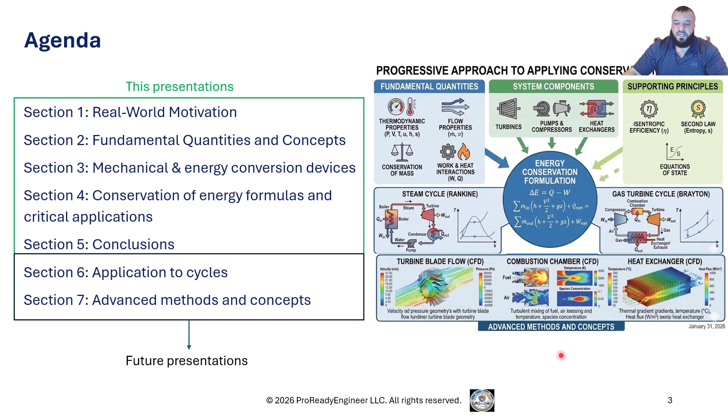Okay. To set you up for success, conservation of energy is a concept that you come across in your day-to-day life, and you either notice that or you don't. So let me tell you.

See the fan that sits on your desk. What is this fan doing when you turn it on? What exactly happens? You say, it blows air on me. That is conservation of energy. How is that? You see that rotating element that rotates—it took this rotating mechanical motion and transferred it to fluid motion.

Your water heater—what does your water heater do? It burns natural gas. You know there's a natural gas connection, many of you probably went in your basement and seen the little flames there. It takes this natural gas and that energy, and heats up your water. That's conservation of energy.

Your air conditioner, your fridge, your car engine—you put fuel in and you get your wheels rotating and you travel. Mechanical motion from fuel energy, conservation of energy. The jet engine, when you fly, that device on the wing that powers the plane—principle of conservation of energy.

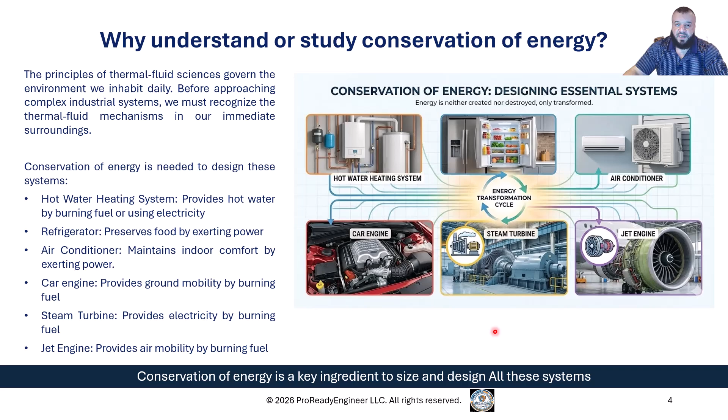This is all governed by the conservation of energy, so it's a key ingredient—we need to know it well. We are going to get on it, starting by the very basic bolts and nuts. We're going to talk a little bit about conservation, concept, properties, heat transfer, fluid flow, work, closed and open systems.

So let's do that. In every section, I'm going to follow the same strategy—I give you the name of the section and the ingredients or components of that section. I'm going to strongly advise you to go back to my video about properties and watch it first. I have a slide here, but the video is like an hour and a half, talking about properties, how to feel them, how to measure them. I got a tremendous amount of positive feedback from people who have seen the video, so thank you for that. Always remember when you watch my materials that I am actually following a sequence—it's not haphazard. I publish something and I build on that, and I keep doing that.

So very quickly, a refresher about thermodynamic and flow properties. U is internal energy—think of it as the energy of the molecules. It's something that's a very strong function of the temperature.

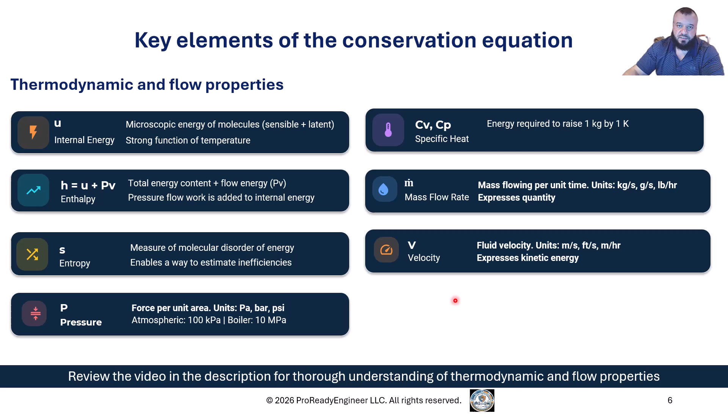Concept of entropy, a measure of disorder. Pressure, force per unit area. CV and CP, specific heat, the energy required to increase the temperature by 1 degree. Mass flow rate, the amount of mass flowing per unit time of the fluid you are working with, and v is the velocity. I'm going to put the link in the description for you to learn more about these properties.

In the other video, I did not discuss these concepts on the screen, so let's get on it. Before I talk to you about conservation of energy, if I'm going to teach you about conserving something, you better know first what that something is. Enthalpy is one of that something. It's the energy of the flowing fluid.

We discussed that. Now add to it potential energy. Potential energy, you've taken it in your high school courses, where they told you MGH, right? There's a datum, you take something, you go from the datum. They told you when you're standing there, the potential energy you have is MGH.

So where is the mass here? Why didn't you put mass, M or M dot or mass flow? Because this is just a specific energy form. Specific energy is in joules per kilogram, energy per unit mass. We often use both flavors: the one where we say here is the energy per unit mass, and then when we say here's actually the total energy, you multiply that by the mass. So the units are joule per kilogram, kilojoule per kilogram, BTU per pound, energy per unit mass, and this also reduces to feet squared per second squared, meter squared per second squared, and so on.

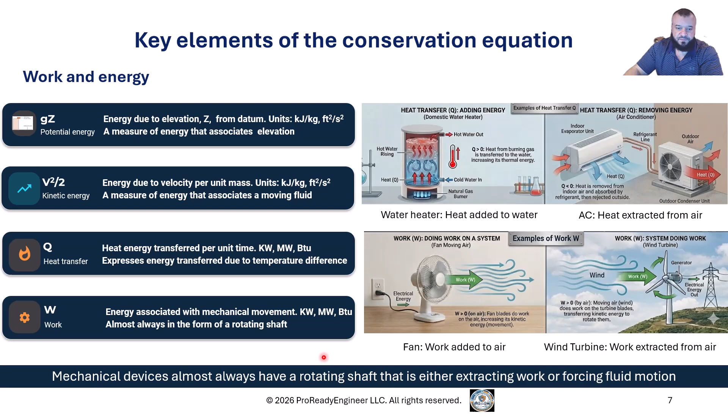If we are analyzing your fan, then your fan is our system. That's it. If we are analyzing your water pump, that's our system. A turbine, that is our system. Your boiler, it's our system. That's system. Open system means there's a mass flowing in and a mass flowing out, or just in or out. There is mass flow.

That's an open system. So when I say that, the first thing that comes to your mind, well, everything is almost, very few applications is where no mass goes in and out. So then we shouldn't have closed system? No, there are closed systems. What happens in a closed system is there's no mass transfer. Mass doesn't come in, mass doesn't go out.

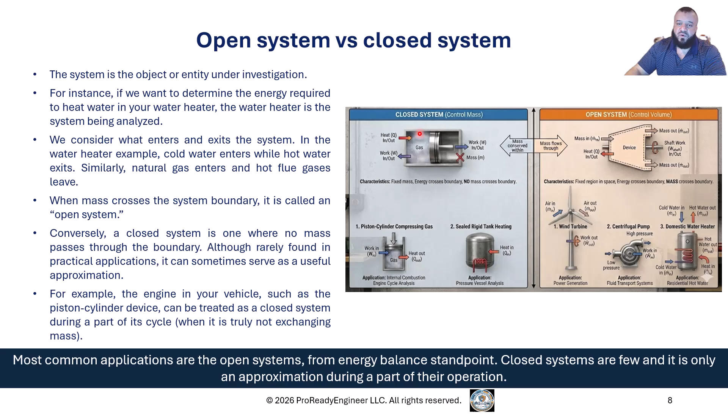Why are we dividing the systems into open and closed? Because our analysis will be a little bit different, by the way. That's it, that's all, just a little bit different. Good, and I have some depictions here. Open system, open system, open system, stuff coming in and out. And a cylinder here with no mass transfer is a closed system.

So what is conservation? Conservation is a common sense principle. All engineering, remember, engineering is an applied science. It's using science to do things that are useful to our lives. This is engineering.

And it all makes perfect sense. Engineers, in my opinion, I would recommend every single human being on earth to study engineering, one way or the other, even just a portion of engineering, even if you get another degree, even if you are a medical doctor. Engineering is amazing in making your thinking structured and geared toward targets, efficiency and economy. It makes you think of multiple things at the same time, very well organized at what you do, and it benefits all aspects of your life.

Conservation is a concept that you know by heart. You say, earlier in the week, I had $1,000, and now it's Sunday, and I have 350. So what happened? Just one second. Well, I spent 650. There's nothing else to say.

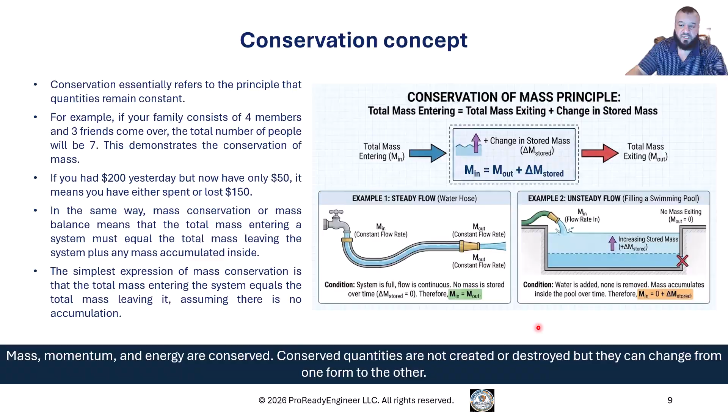So now let's move, before talking to you about conservation of energy, I've given you all the bolts and nuts we need for now. I'm going to introduce you to mechanical devices. We need that before we move forward. What are the mechanical and energy conversion devices I want to share with you about?

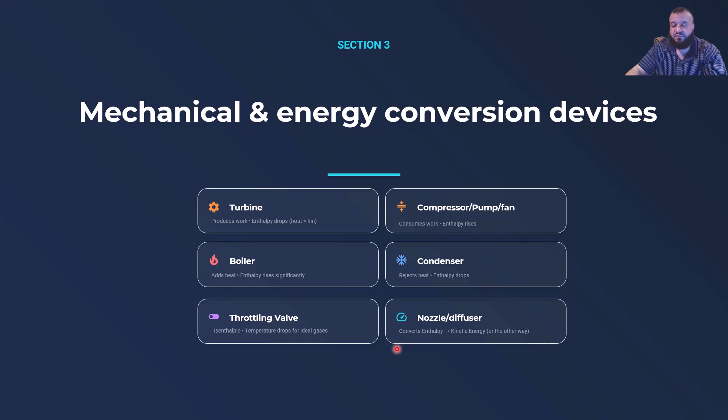We have the turbines family. We have the compressors, pumps, and fan family. We have the boilers, heaters family. We have the condensers, radiators family. We have the throttling valves. We have the nozzles and diffusers. These are devices that exist in everything around you. Let's see what they are and what they do.

Turbines. These are mechanical devices that harness energy from energized fluids. If you have a fluid that is energized, that has energy, you put a turbine and you extract that energy. What do you mean extract the energy? You put that turbine and you get that spinning shaft we are talking about. And once you get a spinning shaft, somebody is spinning the shaft. The turbine is spinning that shaft for you. You can do a tremendous thing with this.

You have seen water turbines before. I've seen a lot of ads on Facebook and YouTube of units being sold now. They go to a river, they have this set of blades, they put it in the river, and the river is flowing, so it's spinning. It's connected to a little generator, and then they have generated power. It's a turbine, a water turbine, but a micro turbine, a very small turbine. But that's the whole concept of turbines. It takes the energy of the flowing river that by itself is not very useful to you, and suddenly makes that something actually very useful - that spinning shaft connected to a generator in this case.

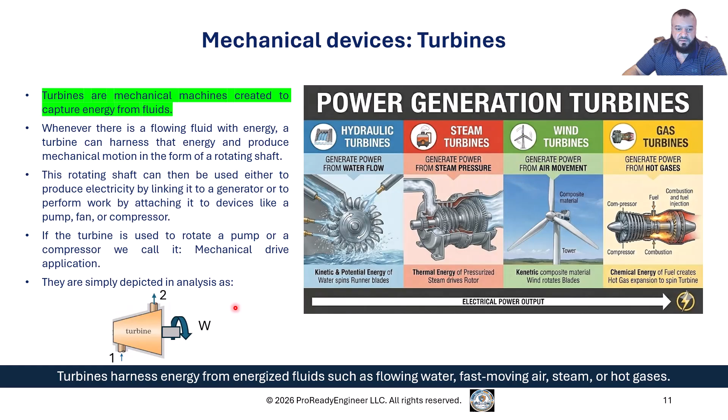In the turbomachinery material that I will present, I may touch a little bit on the different types of hydraulic turbines - Pelton wheels, Francis, Kaplan - and then you will know a little bit more about that concept of specific speed and things of this nature.

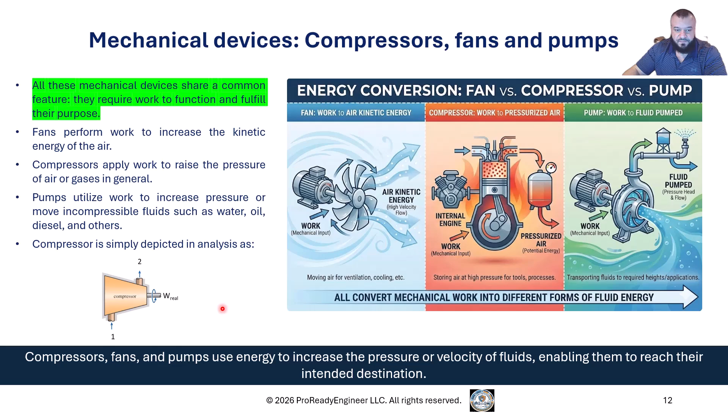A little bit more on the devices. Now, when I introduced energy to you, I said there is the work side of things, spinning shaft, and I completed that - two families: a family that spins the shaft, and a family that needs a shaft to spin. Now there's the family where there's no shaft.

Condenser and radiator are the opposite of that - it's when you want to remove heat, right? Think about your AC, it's removing heat from your home, then a condenser is involved. There's some sort of heat exchanger that cools things down - more properly called an evaporator, just beyond what I want to say today - but it's that device that is pulling air from your home, moving the Q. Now, your radiator - in your vehicle, you have a radiator.

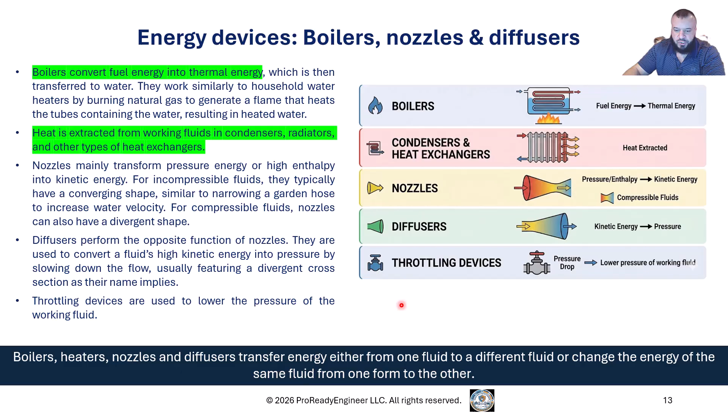Good. Now we are ready to write down the energy equation in a simple form. And once we put the simple form, immediately we put it to application on a very simple example. Then we top it up a notch and go to detailed system level analysis with energy conservation. And then we top it up a notch to advanced analysis that you will actually see and use in the industry, and you will get subjected to some of that in your early career as an engineering student.

Now writing down the energy equation is going to be very simple. If I ask you, after what we have done so far for an hour, when a fluid is moving, what are the energies associated with that moving fluid? You will say there are three things: enthalpy, kinetic energy, potential energy right there. If a fluid is moving and I want to quantify everything it has - all in all, nothing else it can have - it will be enthalpy, kinetic energy, and potential energy: h, v squared, gz.

Where is the mass? Where is the m dot? Why aren't you multiplying? That's the specific energy form: kilojoule per kilogram, kilojoule per kilogram, kilojoule per kilogram. That's it, nothing else to put in. That's all the forms of energy that we can put in.

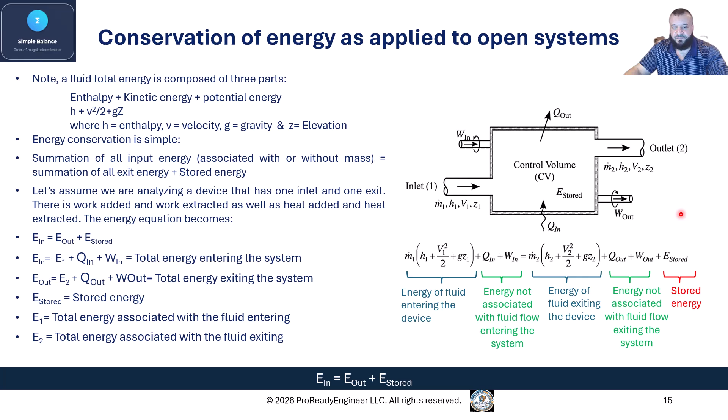And immediately we put this to work, meaning we use it. Let's go and see how this will relate to what you learned on the first law of thermodynamics. It turns out that the first law of thermodynamics is a simplified form of this energy equation that we've written. How is that? Let me show you.

Assume it's steady state - there's no stored energy. Assume no work is coming in. Assume no Q is coming out. Assume the potential energy change is about 0, there's not much difference in the potential energy, and there's not much difference in the kinetic energy. All these terms can disappear from the equation on the previous page.

Plug everything in. You end up with Q minus work equals M dot times delta H, H2 minus H1. And this is this formula right there: Q minus work equals delta H. That's the first law of thermodynamics.

Does it make sense? For now, I think it makes tremendous amount of sense for you. The reason there's a difference between Q and work is actually manifested in the difference in the enthalpy. That's it. Let's put this equation to a few examples immediately here.

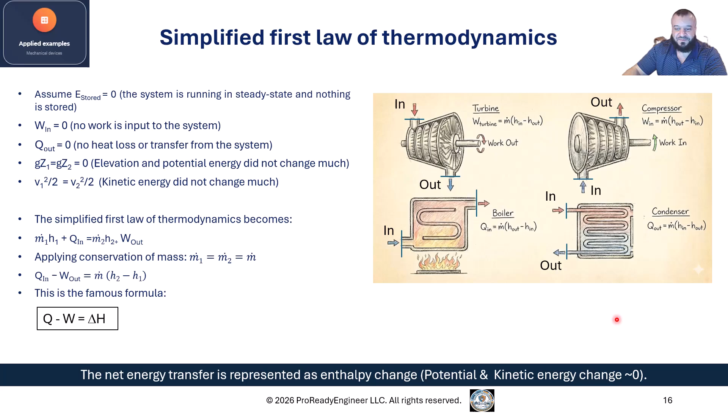Now let's move to the pumps. Why treat the pump differently? Well, you will know in a second - the fact that it is incompressible gives us a simplification to the example and makes things a little bit different in a good way.

So this is a pump. The pump needs work. There's something coming in - this is water coming in, and there's water coming out. When the water comes in with a certain m dot, it has h, it has velocity, it has kinetic energy and potential energy. We'll simplify: m dot, h, v, z2.

Let's write down the generic energy equation. There's no Q out, no Q in, no work out, only work in. Furthermore, we can neglect the potential energy, and we can neglect the velocity difference, assuming V1 and V2 are the same. That's an assumption - it may not be, by the way.

The potential energy difference makes perfect sense to ignore for the pump. If I have this pump here on the table, a very large pump, and you look at the difference between the immediate inlet and the immediate exit of the pump, these are very close - potential energy of what? Compared to the order of magnitude of energy this thing is moving, tremendous amounts of energy, many horsepower, it's like saying you have $10 million and 2.5 cents. That doesn't make any sense - you don't do that. You have a feel for money; please use the same feel for energy. It just doesn't make sense to talk about it. So potential energy goes away.

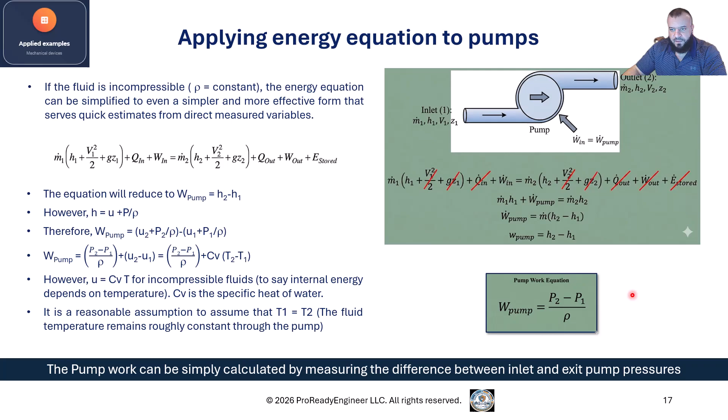Put the terms in, now take a close look. I'm not using m dot, I'm not using mass flow rate. There is no mass flow rate. It's just mass, it's not changing, not coming in, not coming out. And when I express the energy of the fluid, I'm not using H anymore. Why? There's no flow. You don't use H, you use U, internal energy. A fraction of that is what you use.

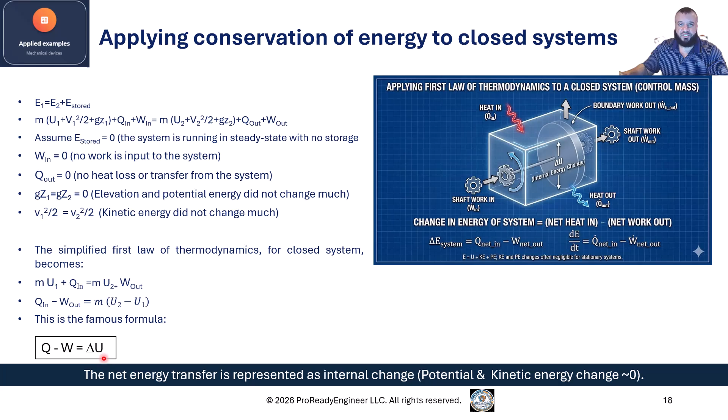Put it in. Q and work doesn't change. Here's the assumption of what's coming in and what's coming out. Do the magic like we've done before, same exact. Q minus work equals delta U. So instead of saying Q minus work is delta H for an open system, it's delta U for a closed system. All of what it is, in one statement: you use U instead of H to analyze a closed system. Good.

I want to talk to you to level up to some detailed analysis now. We are in the detailed analysis now where we are incorporating losses. I want to teach you all about that. So imagine you have that pipe running from the pumping station by the river to your home. Many miles of pipe, or you are pumping crude oil from where it's extracted to a refinery somewhere, or you are pumping natural gas in a line that is running many miles.

There is something important you need to know called frictional losses. Frictional losses are the losses because of friction at the wall of the pipe. Now that pipe, it's made of, let's say, cast iron, let's say it's made of steel, stainless steel, some sort of plastic, or glass - not that one, but the glass we use in a lab for visualization, stuff like that. But what I'm trying to say is, as the fluid is running in there, it interacts with the surface. Where it interacts with the surface, this friction will reduce the enthalpy, or reduce the pressure.

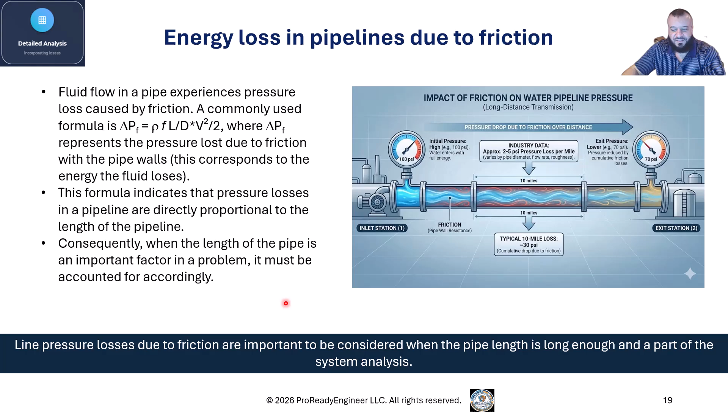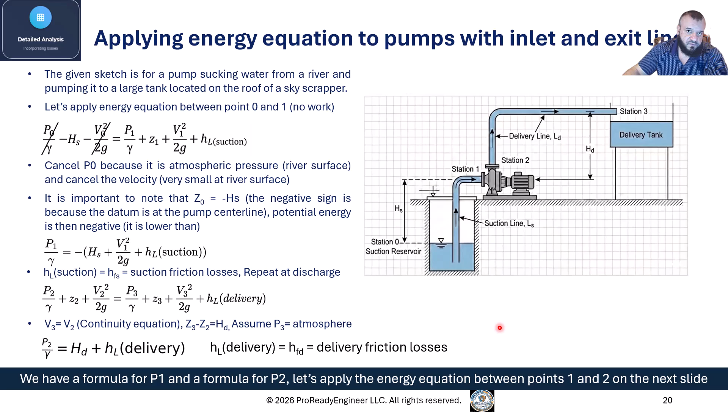Now you are thinking, why did you get a formula of P1? Why did you get a formula of P2? Let's see why. Let's apply the energy equation between 1 and 2. Now the pump is involved. We're going from 1 to 2 and the pump is involved now.

How about if V1, the velocity here, is not the same as V2? Well, that's the difference. And I actually even said that comment when I put it there. This energy equation is extremely simple to write. All what you need to do is write it down and put exactly what is considered and what needs to go away.

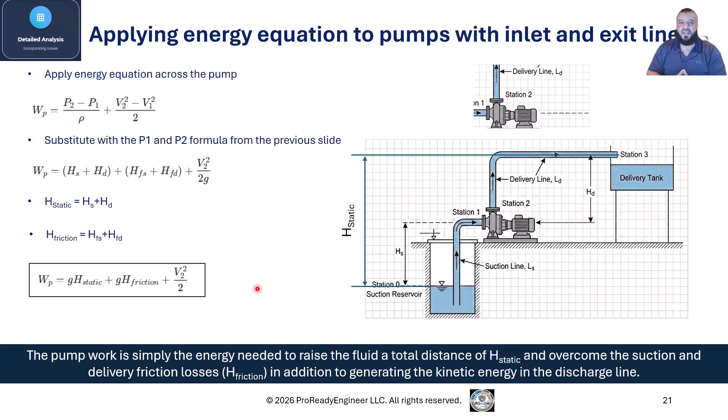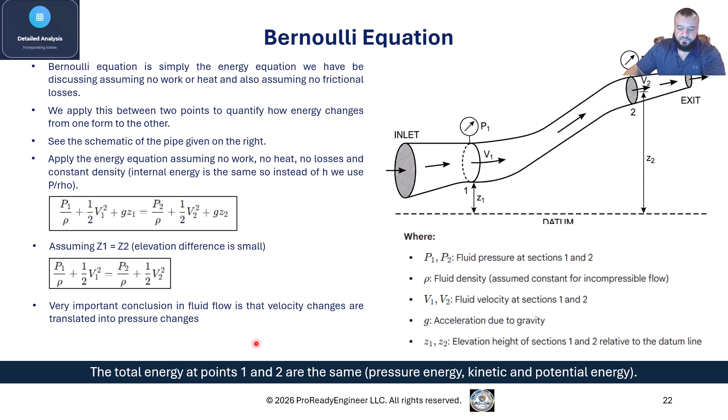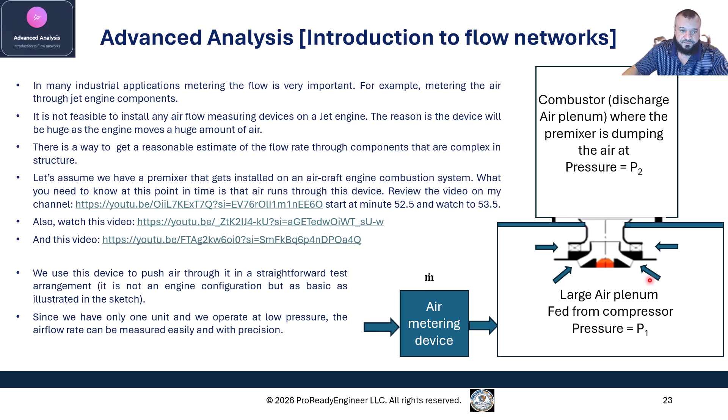Station 2 is very tricky in this experiment, so bear with me. Station 2 is roughly here somewhere. It's not here, it's not here, this is not station 2. Station 2 is here somewhere.

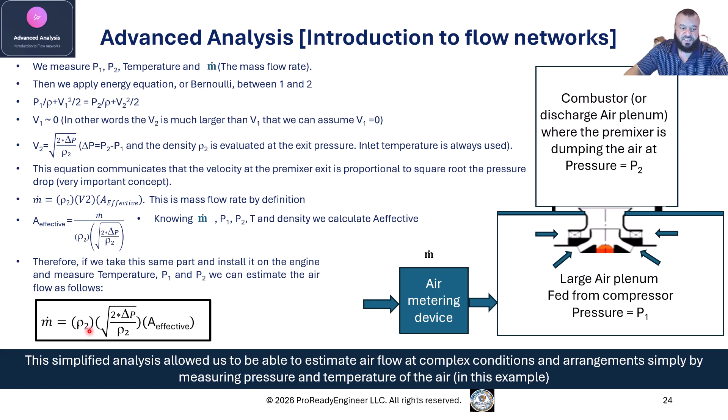But there's actually an even more important reason we do that. It's not only to meter the flow, it's to know how the flow is split. Imagine this is a combustor or a jet engine, and we have many small units - another unit called the heat shield, another called the liner, another called the nugget, another called the first stage nozzle, and quite a bit more. I want to know the air coming from the turbo machinery, from the compressor - the overall air coming in - and I want to know how it splits. There's 30% there, 35% here, 30% there.

How do you know that? That same exercise I told you. You take every component, and instead, you have an area effective and pressure nodes. Pressure nodes mean what's feeding it, where it dumps, what's coming in, where it dumps, and you make a network. Like here, you can use this commercial software, Pipe Flow Expert.

And you can do that for even a piping system. Let's say you have a tank, there are 3 pipes running, and then they divide into 4, and there are valves sitting on the way. I want to know how much water is going to this line, how much to that one, how much here - they call them flow networks. You go to a software like this, you feed it the effective areas you measured, you feed it the pressure points, you hit solve, and voila - it tells you there's 30% here, 35% here, 20% here, 10 here, and 5 there, and you are done. You got your flow splits.

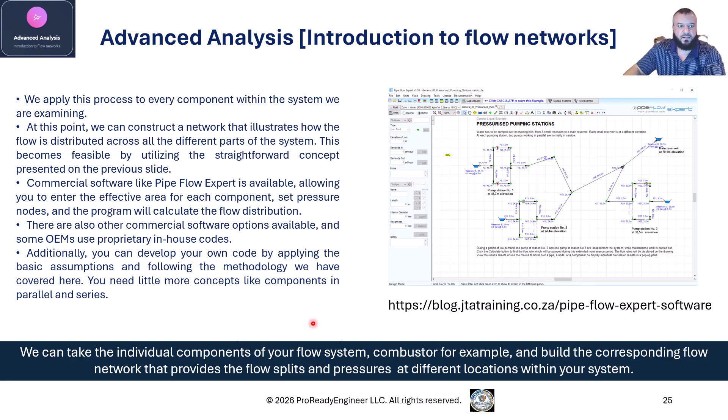Excellent. Good. And we are done, and we can conclude. It's been a great presentation. Boy, it's going to be 2 hours now.

Very simple: conservation of energy. Energy comes in is equal to energy comes out plus energy stored. Remember that energy takes three forms: if it's with the moving fluid, it's enthalpy, velocity, and potential energy. There's Q and work. Remember your devices - turbines generate work, it comes out. Compressors, pumps, fans take work. Boilers and heaters take Q. Condensers and radiators lose Q. Diffusers and nozzles exchange velocity to pressure and pressure to velocity, enthalpy to velocity, velocity to enthalpy.

And we looked at applications, how to write it down for a pump, how to relate it to the pump system configuration. Don't forget about the losses that happen in long pipes. When the pipe is not long, when you're right at the inlet of the pump, you tend to say this is of no significance. Potential energy, when you take it out, when you keep it, velocity changes. We've known how to extract from this general equation the Bernoulli equation, a simplified form. The Bernoulli equation was tremendous in helping us understand the concept of velocity changing to pressure, pressure changing to velocity.

We discussed some advanced concepts of how to take a complex shaped geometry and express it as an effective area. We discussed flow networks and how this is used to split the flow on a structure. And that's about it.